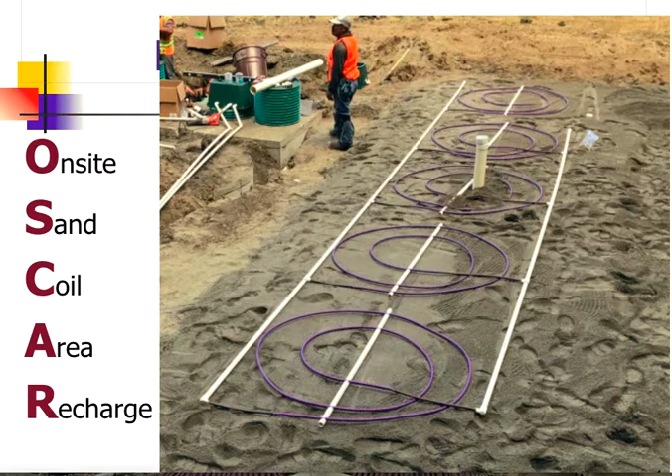The Oscar II is a proprietary technology that meets treatment level C, and it also acts as a final disposal component. We are able to reach a higher treatment level and have the minimum soil depth of 12 inches when we add a different treatment vessel that has a higher treatment level. And we'll get into that in a little more detail toward the end of the presentation.

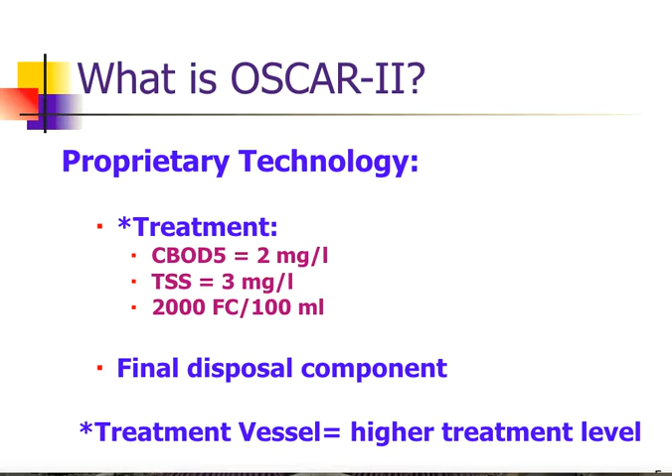The Oscar II is comprised of four main components. There are Oscar coils, which come in two different versions. We have a 50 gallon a day unit as well as a 100 gallon a day unit. The OS 50s are a 5-foot coil. The OS 100s are a 7-foot diameter coil.

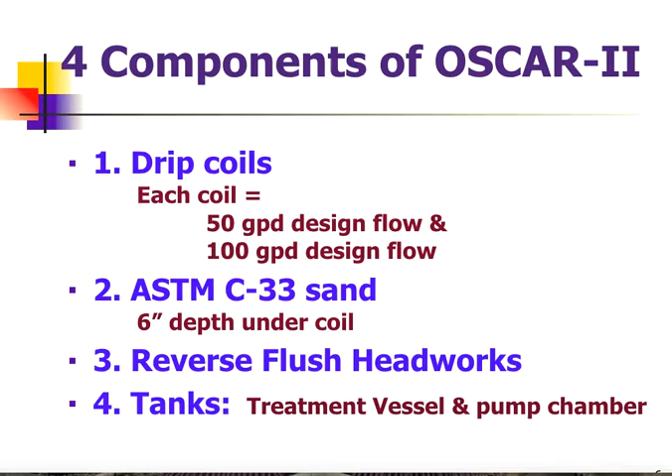We also incorporate C33 as a treatment media, minimum of 6 inches of sand depth under the coil. We incorporate a reverse flush headworks that helps keep the tubing clean and flowing. And then we have two tanks, a treatment vessel and a pump chamber.

When the Oscar is installed, we will prepare the basal area. We'll put a layer of 6 inches of C33 sand down. The coil, which needs to be level, will be placed on top of the sand, and then we'll backfill or cover the coil with another 6-inch layer of C33 sand.

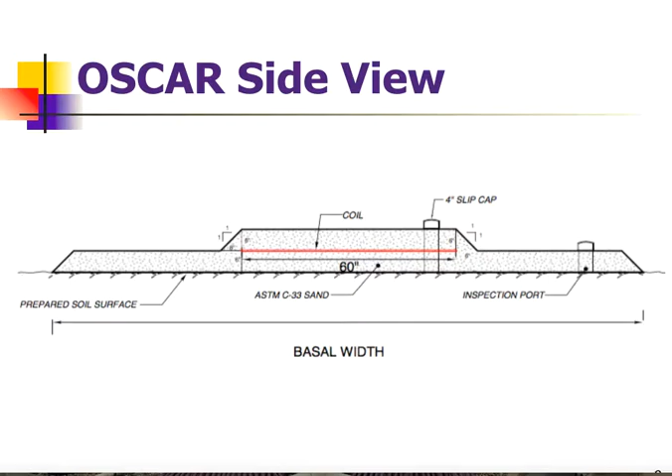After about a year or two, or one or two growing seasons, a grass lawn will grow over the top of the Oscar, forming a nice firm basis. The sand media is firm enough where they can mow this lawn with a riding lawnmower.

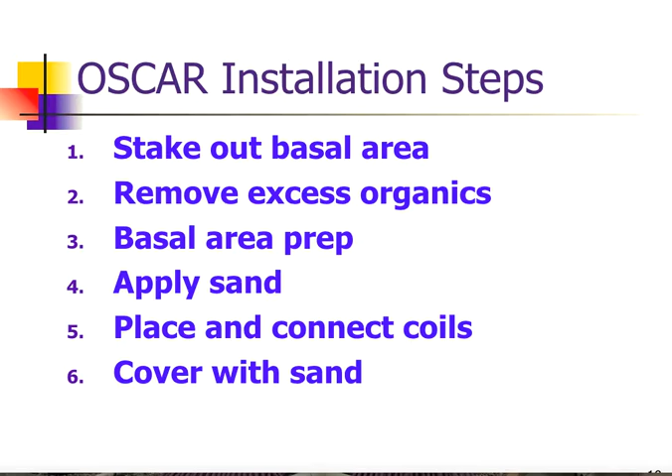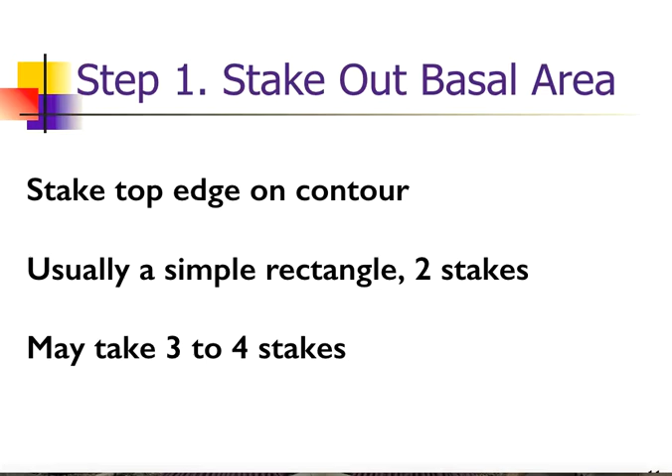To install the Oscar drain field is 6 basic steps. The first step is we want to stake out the basal area. If it's on a contour, we'll want to stake 3 or 4 stakes along the contour on the upper edge to determine that edge. But usually it's as simple as a rectangle with 2 stakes total.

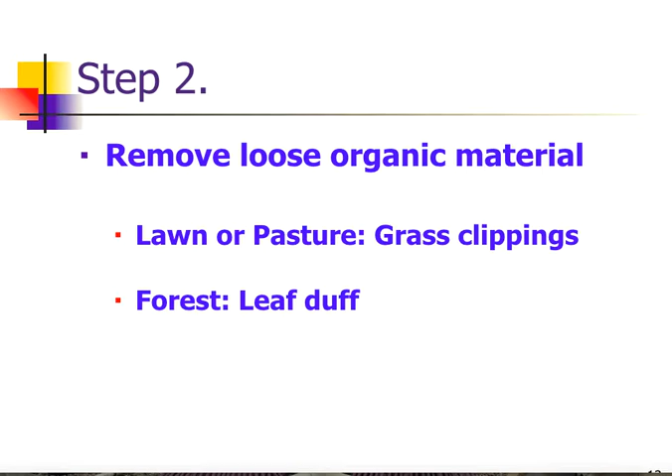Once we've staked it out, we're going to remove excess organic material from the basal area. This does not mean removing the sod. It does mean mowing, whether it's a pasture or a lawn. If we've got very, very tall grass or weeds, we'll need to mow that off down to the sod layer. If we're in a forested area, we do want to take the leaf mat off the ground down to the mineral soil.

At that point, we're going to go and do the basal prep. And that's just as simple as taking the excavator bucket, placing the teeth about 2 inches into the soil, and doing a one-time pass. So we create little furrows within the ground. Whatever sod comes out of the ground comes out. Whatever stays, stays. And so at this point, then we'll go ahead and apply the sand to that surface.

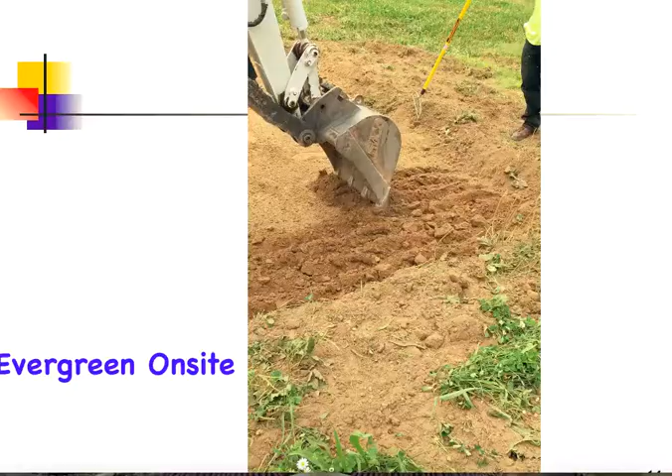Sometimes the ground can be really dry, especially in the summertime, and it appears as if all we're doing is just kind of mixing up or pulverizing the soil. But regardless, even though we've got loose stuff on top, we're always going to be creating a structure within the soil that precludes water from being able to move sideways through the soil or down the slope of the site.

The liquid will percolate down through the sand, hit the soil layer, and if we're on a slope, in order to move down slope, we would have to go over these little furrows or humps, slowing the water flow down and allowing the soil maximum amount of opportunity to absorb the effluent. Once we've created the furrows, we're going to apply the sand.

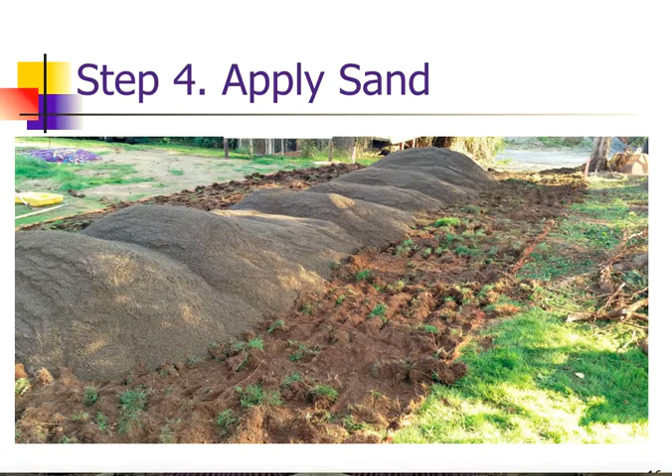We'll spread that sand out to our minimum depth, again of 6 inches. The area that the coils will go in must be level, so if we're on a sloping site, we're just going to have about a 6 foot to maybe 8 foot wide path, depending on whether we're using the 5 foot or the 7 foot coils, where we want to maintain the level pad for the coils.

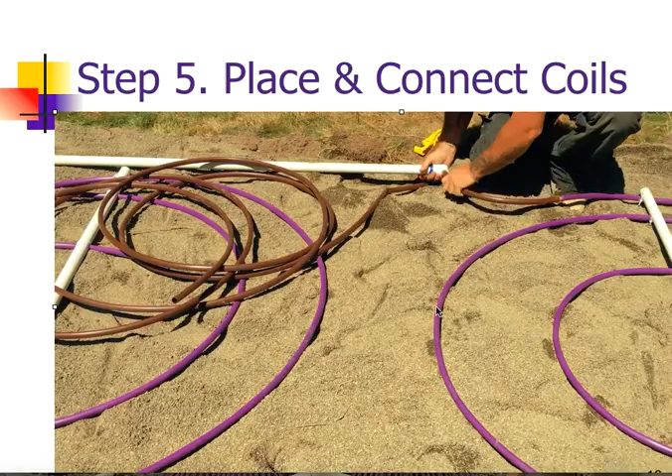Once the coils are placed, we will connect them. The kit that we ship out will include PVC fittings with the adapters, the solid tubing for making the connections between the drip tubing and the manifolds, as well as the couplings to make those transitions. It is important that we have a minimum of 6 inch spacing between the coils. We can be larger if need be.

The simplest way to do the installation, once the coils are laid out and we've got their approximate spacing, we'll just glue a series of 1 inch PVC lengths of pipe together. On one side we'll have the supply manifold, the other side the flush manifold, and then we'll just cut in the connection tees where need be. So there doesn't need to be any measuring, we just cut and glue.

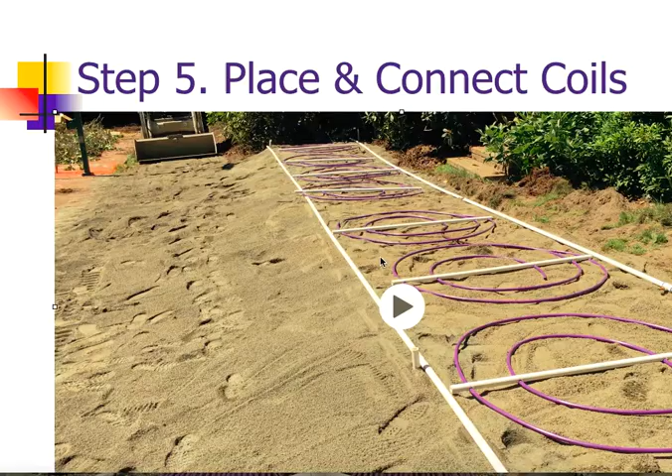Occasionally we'll be on a site where the Oscar will be on a curve. In that case, we may want to put both manifolds on the outer edge, so we have a much larger radius of turn on these pipes. The only concern is that we want to take some care that there will be one length of tubing that will cross one of the manifolds. We just want to bed that so that we don't kink that tubing.

The only material that's required to cover the coils is C33 sand. You may choose to use a little bit of cover soil over the top of the Oscars, which is fine. We want to keep that to a small layer of 2 to 3 inches. Make sure that the soil has very low organics, less than 10% usually.

In cases where it may be a while before the system is going to be used, we'll want to put some straw over the top. But we want to plant grass seed or some kind of ground cover on there as soon as we can. Some people may choose to put some jute mat down to hold the sand in place until vegetation grows.

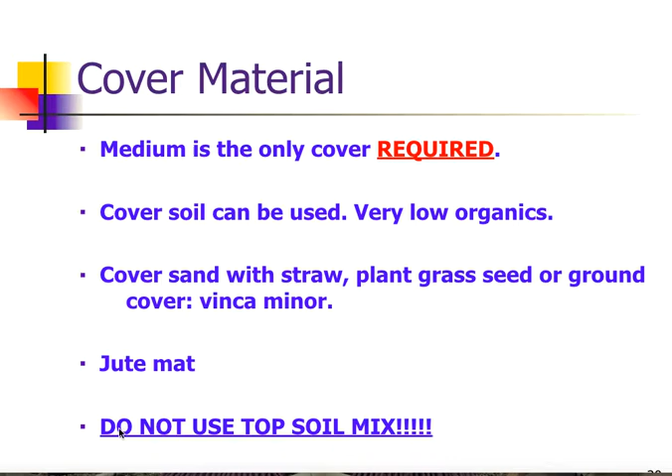Whatever we do, we do not want to put the commercial grade topsoil mixes on there. They have very heavy organic contents, lots of compost. That material tends to hold water, and it makes the system appear to be failing when it's not. Once the Oscar is covered, it has a kind of a stark gray sand cover on top. Again, once we get things planted, it grows quite readily once the system's put into operation.

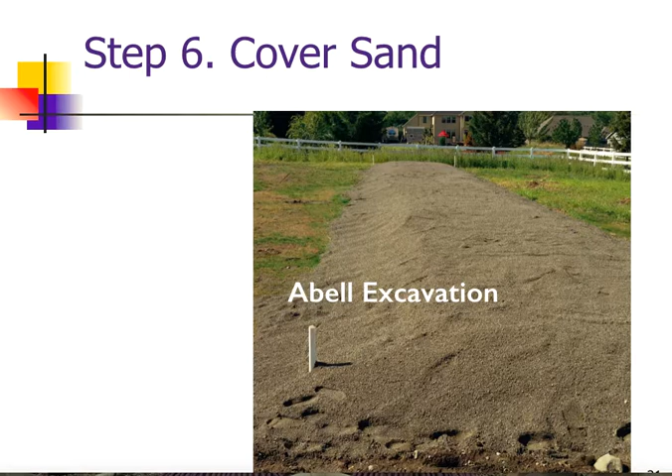It takes about 2 hours, a little less, for two guys to install an Oscar start to finish. That is the drain field portion. So it's a very quick and easy install.

Now, the treatment vessel that we've described really has to meet 3 criteria. One, it must be on the Washington State Department of Health's list of registered wastewater containment vessels. Two, it must be on the Lowridge's list, which we maintain on our website. And the third criteria is these wastewater treatment vessels must have gone through an NSF test and meet at least 100 CBOD and 75 TSS milligrams per liter.

Typically, any system that has done that meets a much higher standard, so we end up really meeting more like a 15-15 standard. One thing though is, if the treatment vessel meets treatment level B, the Oscar 2 can be installed in as little as 12 inches of soil.

An example would be a NuWater BNR-500 tank. It meets the treatment level B standards. When you use that treatment device with the Oscar 2, you'll need to order a NuWater-O. It stands for NuWater Oscar. It is the same package as the BNR 500, just minus the control panel. We'll be using the control panel that's included in the Oscar 2 kit.

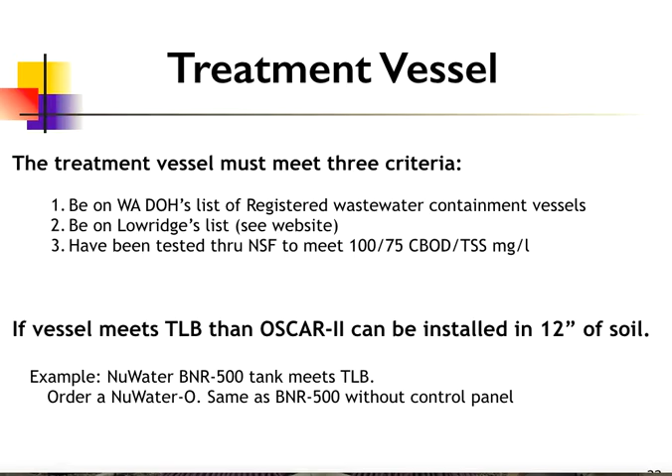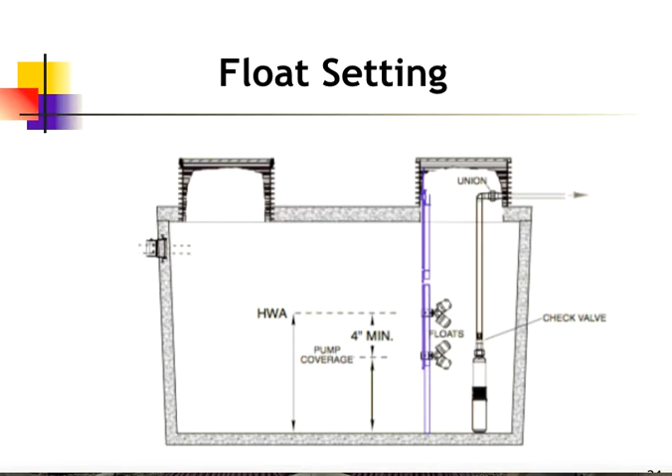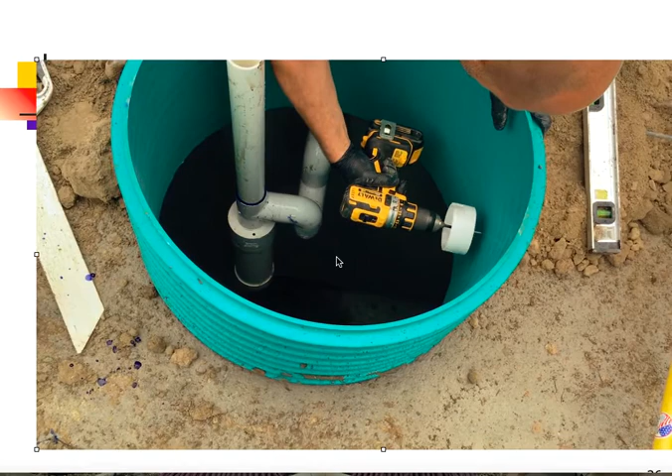Float settings in our pump chamber. There are two floats. We want to have the bottom float at least to the top of the pump, if not higher. The top float is about 4 inches above the bottom float. Very simple settings. The floats in the kit come with float brackets or float collars. It's just a matter of tightening the stainless steel screw at the desired location. We also supply an orifice shield with the stainless screw so that we can use that to hold up our float tree.

So we can just take that float tree, snap it in place. The float tree is the entire length from the bottom of the tank up into the riser. So the orifice shield is just there to hold the pipe in place. The float tree itself holds its own weight by resting on the bottom of the tank.

The placement of the reverse flush headworks will go directly on top of the pump chamber. It will be plumbed in as so. We do want to point the to coil and from coil lines as directly as we can to the Oscars. We'll come out of our pump chamber at 90-degree angles to the headworks, and we will have a flush line, or what we call a vent line, which will go to a 4x1 T supplied within the Oscar kit.

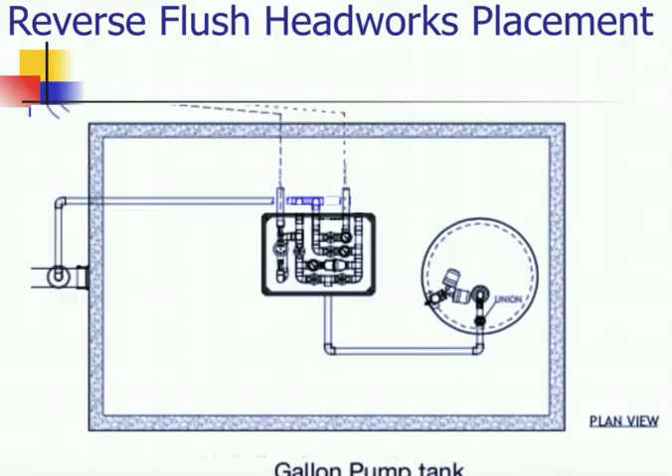Inside the headworks, the internal portion is complete. You will have to glue at four positions: the from coil, to tank, and to coil, and the last one will be from pump. Once those are glued in, the plumbing to the headworks is done. You may want to adjust the box so that the guts of the headworks is centered within the box, so that none of the valves or anything you need to service will be touching the side of the box.

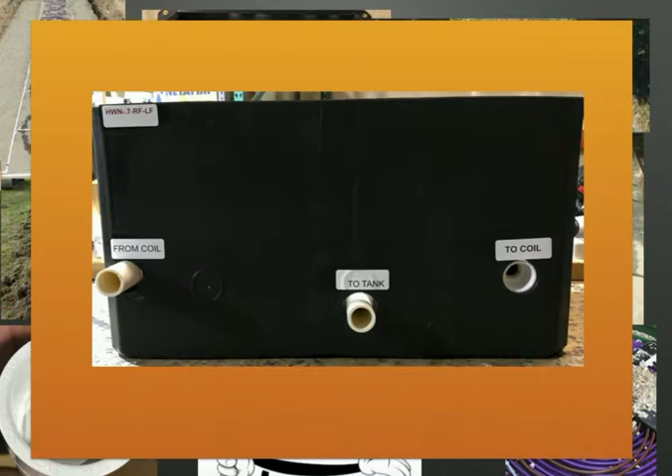The external portion of the unit will just have these labels that will tell you where the plumbing's to go. Again, to and from coil are going to be connected to the manifolds of the Oscar, and to tank will go back to that 4x2 T illustrated earlier. On the flip side of the box, you'll just see a from pump, and that's going to be the pump line coming from the pump chamber.

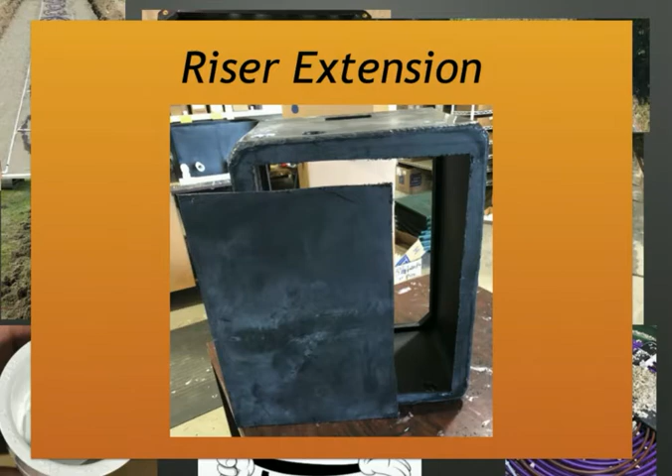Most of your installations are going to require a deeper burial depth than the 1 foot that the riser box will allow. In that case, we always provide a riser extension. The bottom of the box will be removed. The extension will just be placed on top of the headworks box. There'll be about 8 to 10 self-tapping stainless screws. You'll just screw the flange of the extension onto the lip of the headworks box, and that will be firm enough for backfill. Place the lid on and backfill, and you'll be done.

The headworks boxes and the extensions work such that if you have a full 2 foot riser on your tank, by putting the full extension riser on your headworks box and the lid, you'll come out at about a 25.5 to 26-inch tall headworks arrangement. And if you were to compare that with the riser with your lid on there, the lids will be completely even, so it makes it real easy for backfill.

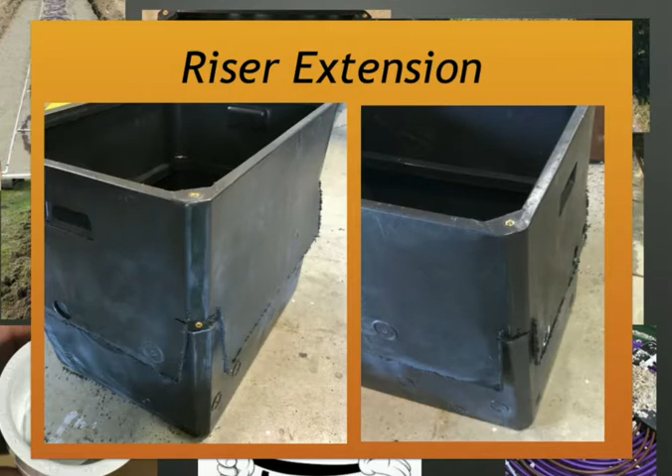Sometimes you'll want to have a riser extension less than a full foot. For instance, if you have an 18-inch tall riser on your tanks, you may want to then measure down from the top of the riser extension your 6 inches, make a horizontal cut, and then remove the corner on all four corners. Also remove the flange on the bottom, and then screw with the screws that are provided, two or three on each side, just to hold it in place.

The extension riser will not settle down with any kind of weight on top. The corners line up so that any of the weight that you may have on top of this extension will be just transferred down through the corner, then down to the bottom of the tank or bottom of the box. And when you're through, it's a nice clean installation. And at the end, just put your original lid on the riser extension and backfill.

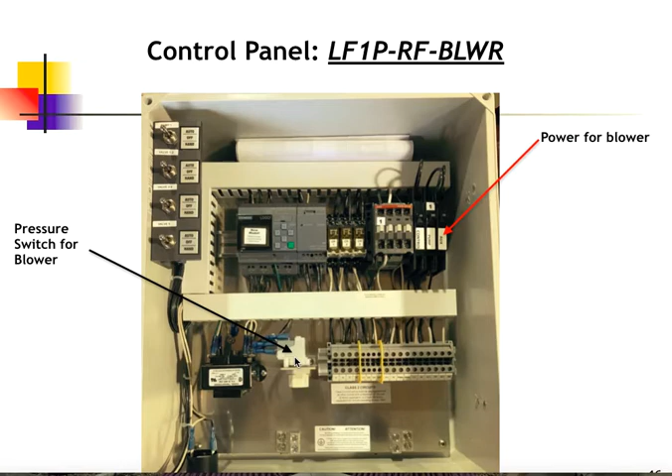Now, once the system is installed and wired, we want to conduct a quality control check called the startup procedures. In this process, we are going to verify that the floats, pumps, and valves are all wired correctly, and we'll also record the flows and pressures to be able to validate that the system actually was installed as intended.

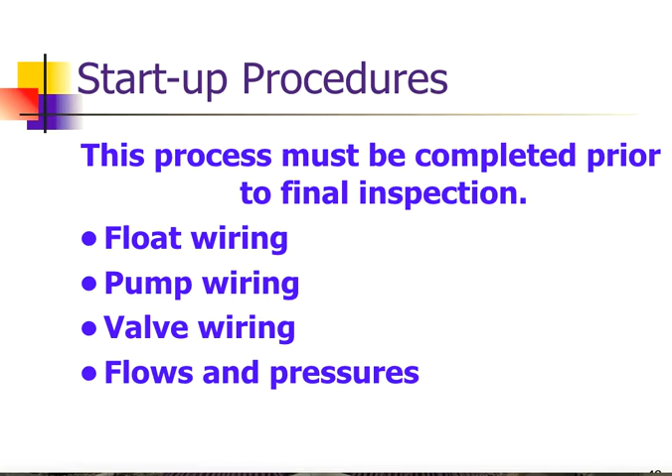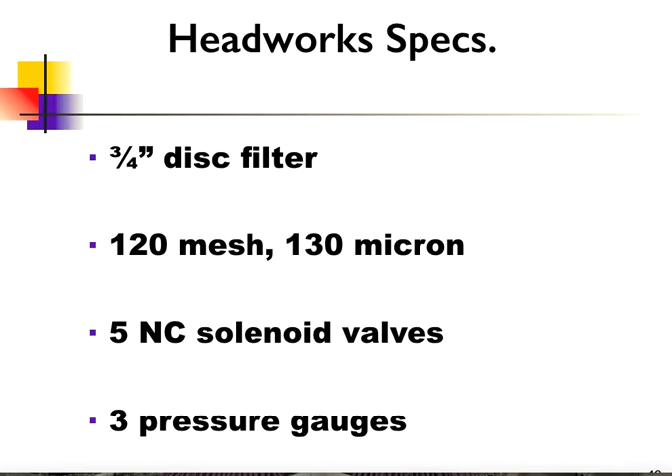Our Headworks has a 3/4 inch, 120 mesh disc filter. It has 5 normally closed solenoid valves and 3 pressure gauges. The solenoid valves are made for a sewage type application. They are not irrigation valves put in the wrong application. All the valves are normally closed, which means in order for anything to flow through the valves, we need to have at least 24 volts to energize the solenoids, as well as 15 psi to open the valves. So we need electrical current and hydraulic pressure.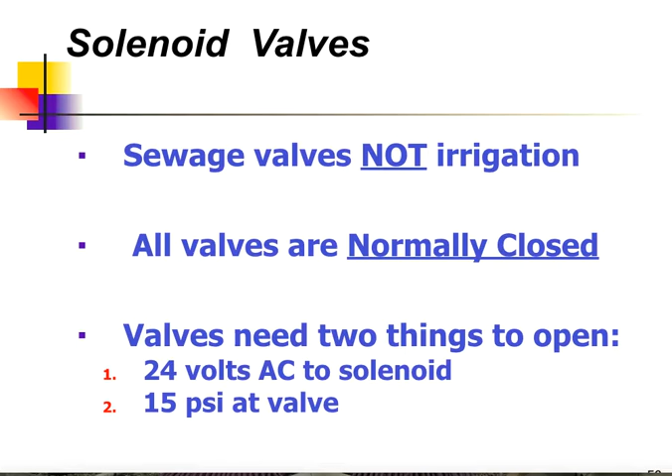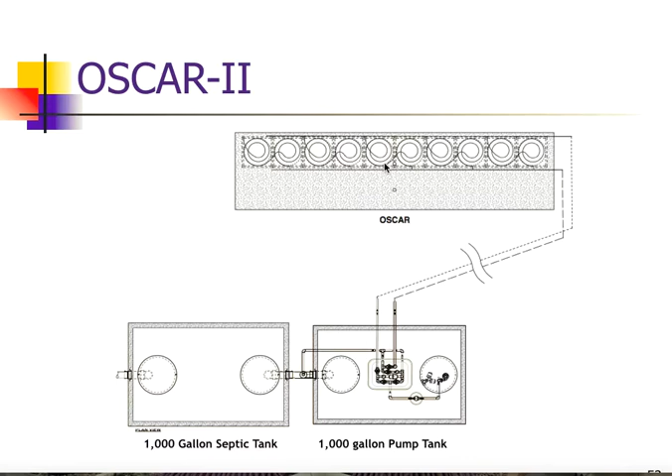When the control panel is actually set up to give us 90 doses, at the 91st dose, it's going to back flush the disc filter. After that, we are going to forward flush the coils, and then we'll start another 90 doses, and it just keeps repeating these same processes. So we want to be able to validate or check that the wiring was put together so that these functions will take place.

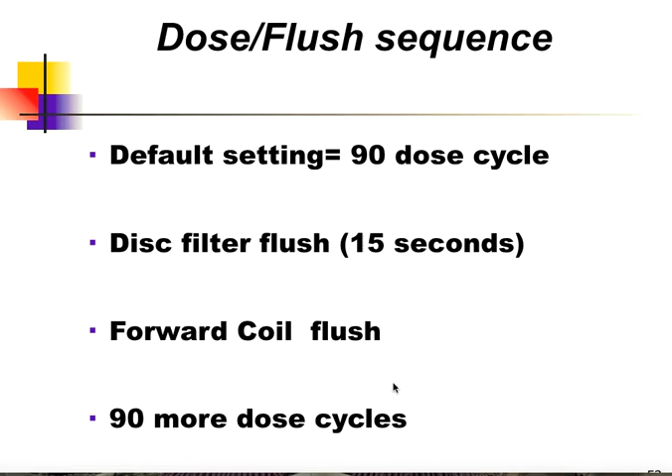In our control panel, you'll notice there are 4 toggle switches. One toggle switch will operate our pump. It can either be auto, off, or manual, or hand. We have 5 solenoids, but 2 of the solenoids, 1 and 2, always operate together. Another 2 solenoids, 3 and 4, operate together, so there's one toggle switch for it. And then we've got a 5th valve, so we have a separate toggle switch for it.

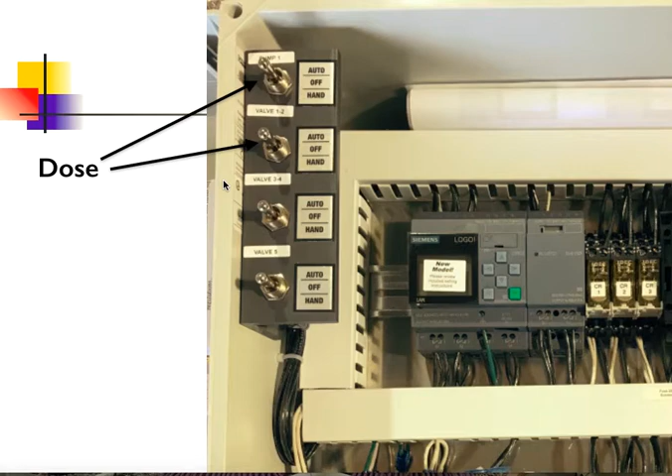So if we want to test the headworks and make sure the pump is wired correctly, we will turn pump number 1 to hand, and then we also want to get power to valves 1 and 2, so we'll put the second toggle switch into the hand position. And what will happen is as the pump comes on, this green line demonstrates the flow path. Because only solenoids 1 and 2 are open and 3, 4, and 5 are closed, our flow path will follow this route, go through the disc filter in the forward motion, and go out to the coils in the Oscar, and then we'll deadhead against valve 5.

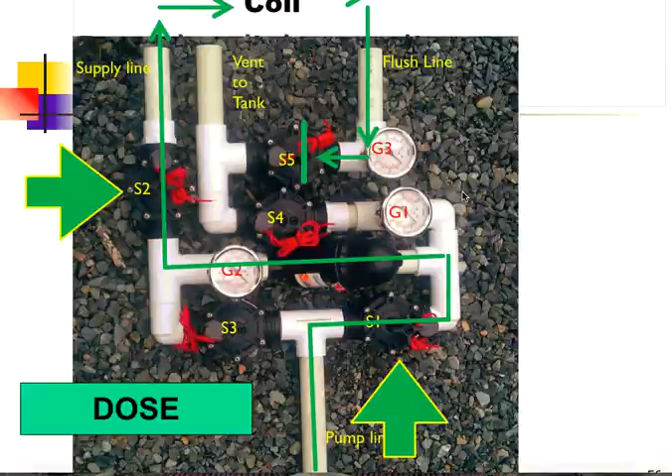When we do that, our pressures on all three gauges will be about 50 psi, somewhere between about 48 and 52. And that'll indicate that at least these two valves and the pump have been wired correctly. And this is what the flow path would look like if you could see how it was going in the piping itself.

Once we've verified that we've got the dose works with valves 1 and 2, we want to test the reverse flush sequence. The normal flow through the filter is water will come in the filter housing and then move from the outside of the discs to the inside center and then out to the coils. What we'll do on this filter flush is we're going to reverse the flush, make it go backwards so that it pressurizes the inside of these discs and then forces water at high pressure and flow out to remove any debris that's trapped inside the discs.

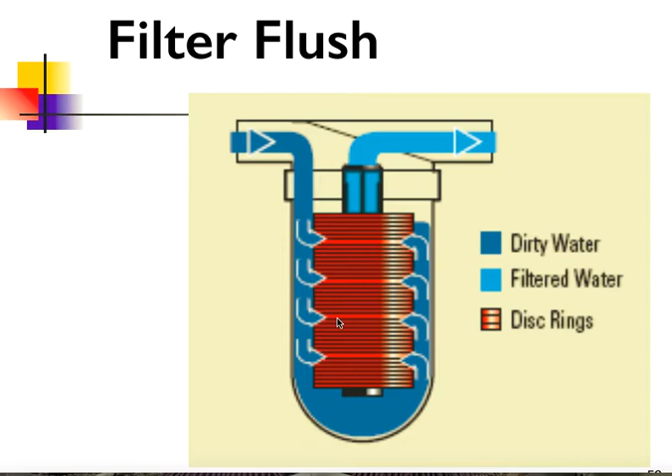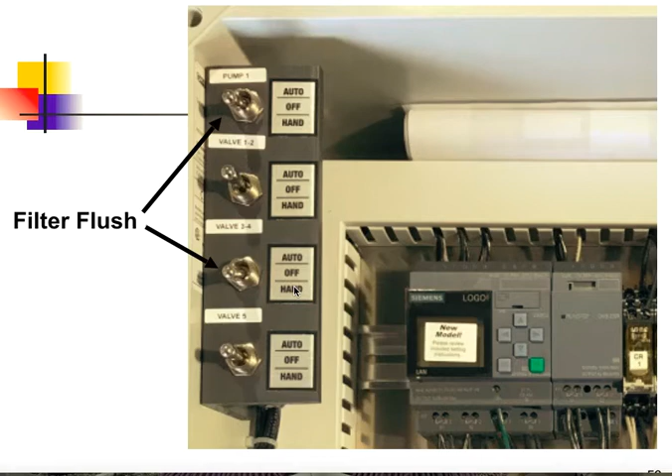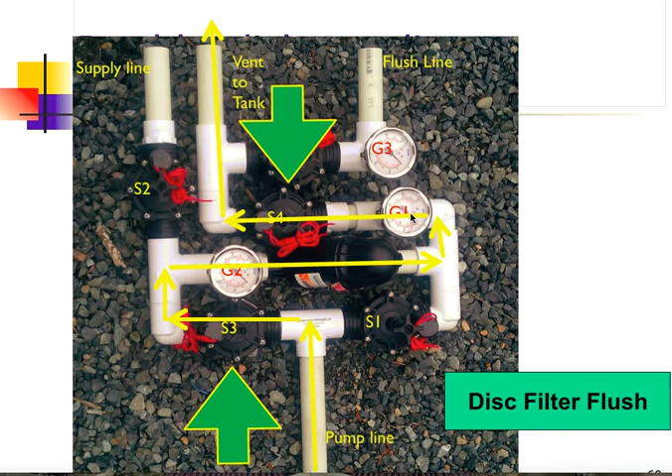What's not shown here is a spring that when the pump comes on will actually compress and relax the tension on these discs, which will allow more material to be dislodged during the back flush sequence. So in our control panel, we'll turn pump 1 on. We'll turn valves 3 and 4 to hand. And now the flow path follows the yellow line. And the way we'll be able to identify correct wiring or operation is that gauge 2 will be at about 20 psi. Gauge 1 will be at about 10. And we will have a significant flow going back into the inlet of our pump chamber.

And this is what the flow path would look like. Because we have no flow and pressure going to gauge 3, it'll read 0. And if we were to measure the flow in our flow meter, we would see about 28 gallons a minute in this short circuit between the pump and back into the tank.

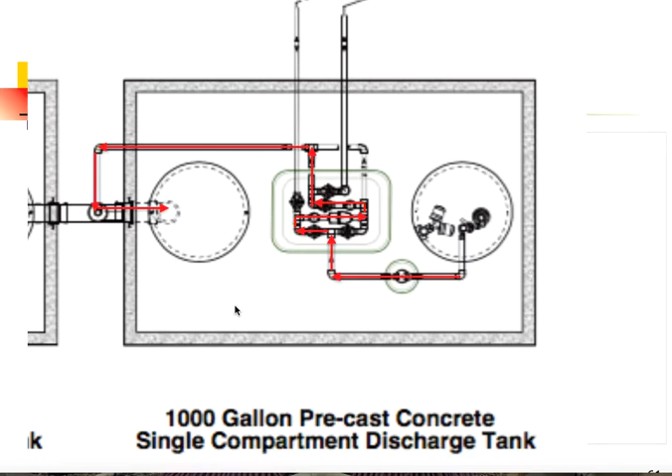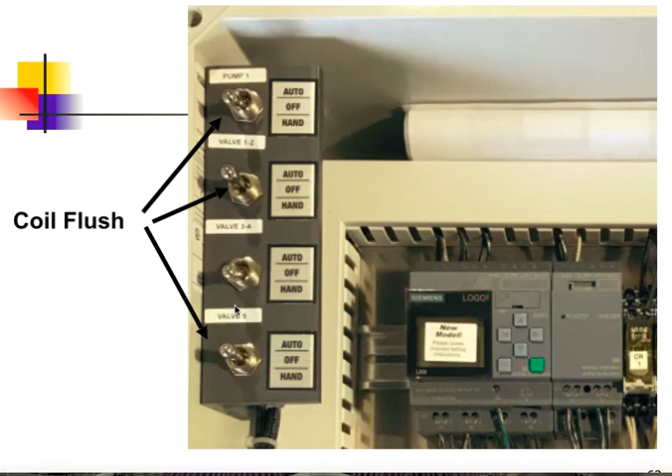The last thing we want to check electrically will be the flush cycle. Here we want to turn pump 1 on. We're going to have valves 1, 2, and 5 energized. And it'll be very similar to our dose sequence, except that with valve 5 being open, we're going to relieve all this excess pressure and allow the excess flow to go back in the tank. And in this case, we're going to have pressures on gauges 1 and 2 of about 40 psi. Gauge 3 will have 0, maybe 1 or 2 psi at the most.

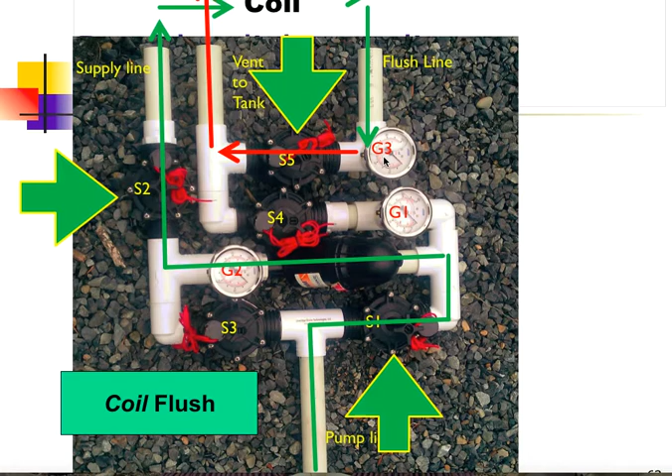And this is what the flow path would look like in that case. Now the flow coming into the tank will be about half of the flow as when we back flush the disc filter. We've got quite a bit of friction loss, and we do have some pressure and flow loss within the coils themselves.

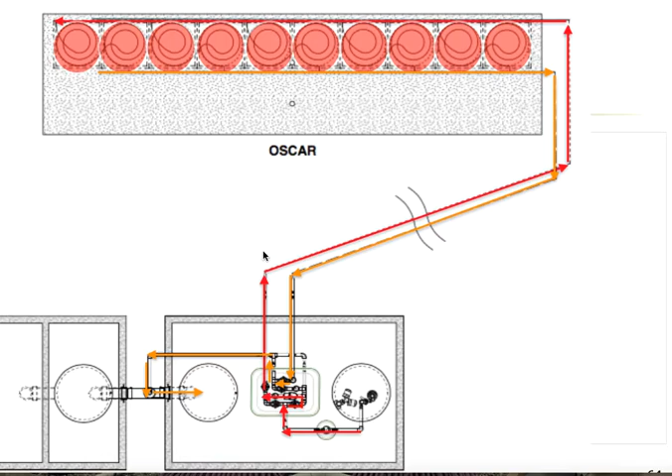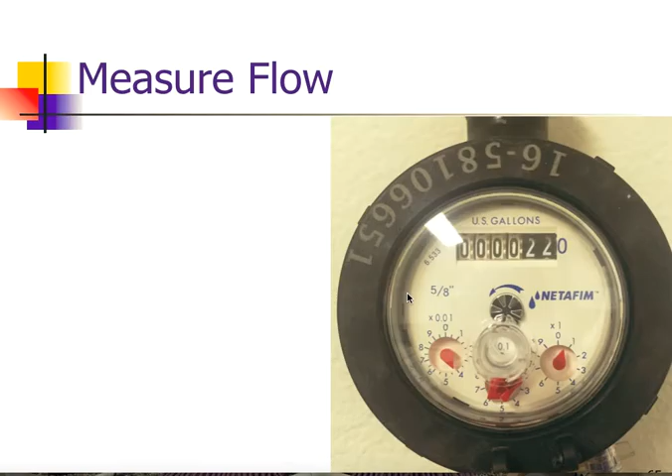Now, when we're doing the dose, where we just have valves 1 and 2 open and with the pump running, we're going to want to be able to measure what the emitter discharge rate is. On these disc filters, on these flow meters, you'll notice that we've got 3 dials and kind of an odometer here.

The first dial on the right here, each digit here will represent 1 gallon of flow. On this middle dial, it's 0.1, so each digit is 1/10 of a gallon of flow. And this is 0.01, so this dial will be 1/100ths of a gallon of flow per digit.

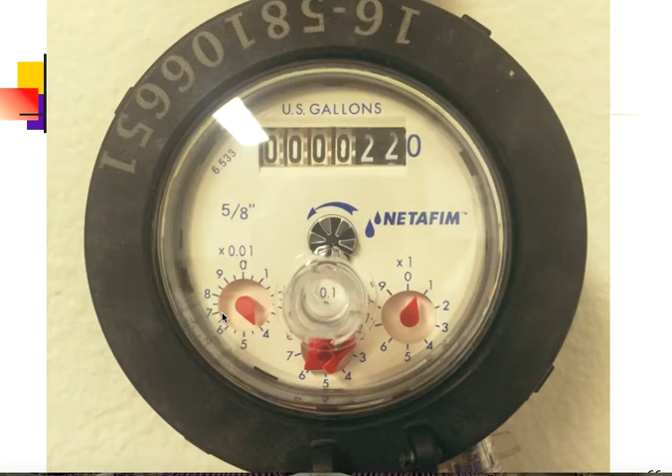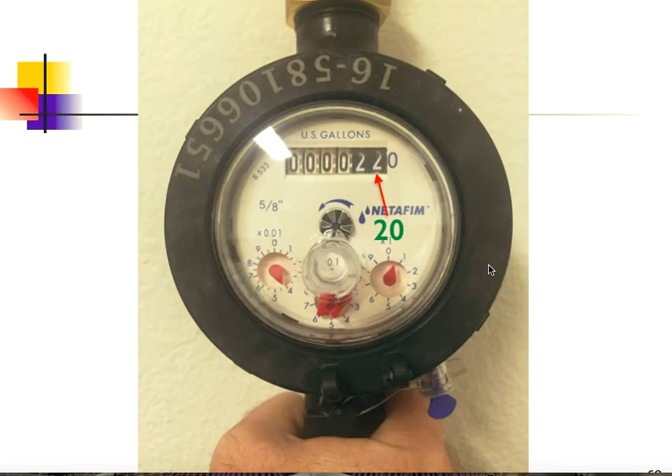So if we were to read this dial, or this pressure flow meter, this first backlit or dark background number is actually the 100s, and this is for the 5/8 inch filter. So this first number would be 200. The second number is 20. And we paint the single digit as a representation of just 0 here on the face.

So we'd have to read the single digit dial, and it's less than 1. So we'd have to continue on and look at what the tenths and 100ths dial say. So if we were to record what this meter's told what their total flow has been so far, we would write 220.64 gallons.

Now, the advantage of using this particular meter for just measuring the flow is we don't have to use any math. All we'll need is a stopwatch on our smartphone, and we'll time 1 minute, and in that minute we'll just count the rotations of this middle dial, and that number of rotations in a minute tells us what our gallons per minute flow is.

Again, no math. You don't have to worry about rounding numbers, getting the right start and stop readings, and doing the subtraction correct. Just run the stopwatch for a minute and count those rotations on that middle dial.

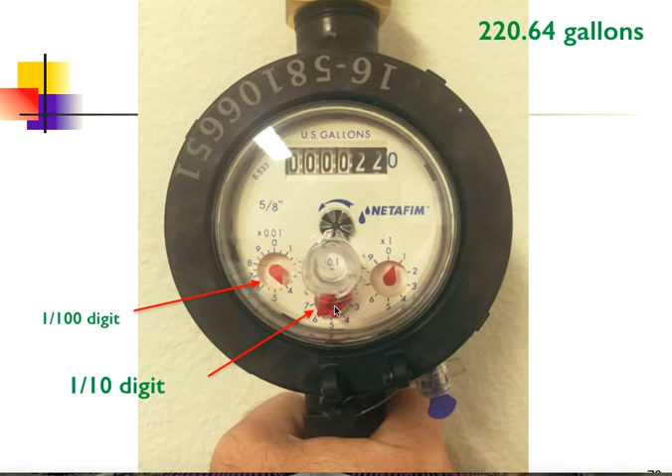Now, the math you will need to do is you will need to have an idea of what the flow per coil is. On the 5-foot coils or the OS50s, it's 0.35 gallons a minute per coil. So an example would be having 10 coils for a 500 gallon a day system. We would have a flow emitter discharge rate of about 3.5 gallons a minute. The OS100s are twice as large or have twice as many emitters, so they'll flow at twice the rate at 0.7 gallons per minute.

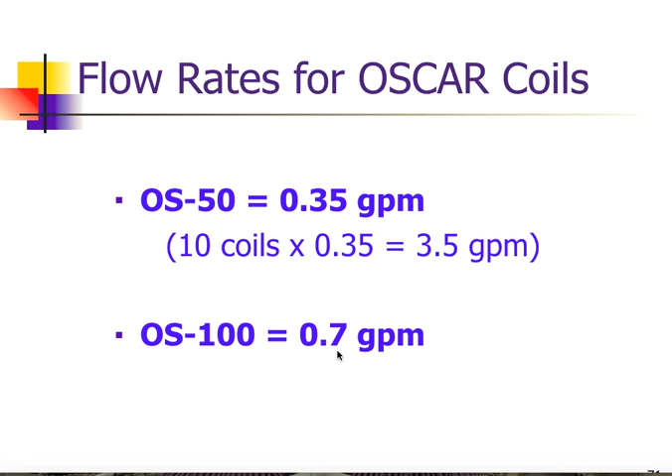And of course, we need to know what to record. Really, it's only two criteria. We want the pressures during the dose on gauges 1, 2, and 3. And then we're going to know what the emitter discharge rate is during the dose.

Now, the control panel is set up with a factory default setting of 3 minutes 38 seconds off and 22 seconds on. That does not need to be changed. The number of coils will increase the flow, but the time sequences will stay the same. These are pressure compensating emitters, so it makes it very easy to do the setup on the system, very easy to do the design as well as the installation.

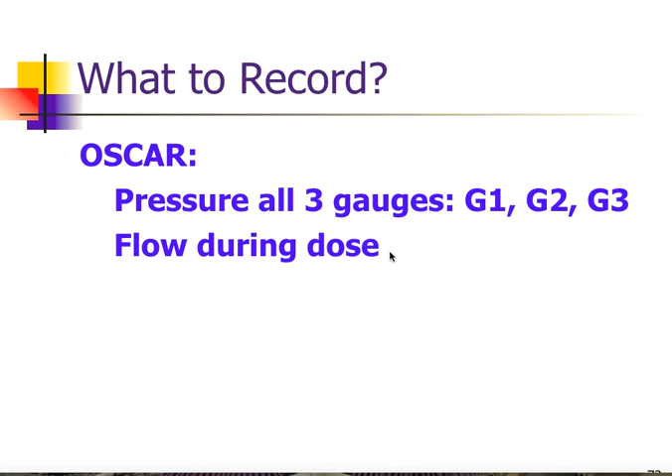Now, our certification process starts with a classroom training or this online video training. Once you've completed this, I would suggest that you give us a call. We will then answer any questions you have, talk about a couple of details that we may need to go over. But from here, we'll put your name on our certified list of professionals as an installer. Then either one of our distributors or someone from Lowridge will come out and do the first install with you on site.

What we would ask is that the tanks be in the ground and that you do the basal prep and place the sand on the prepared area. And then we'll show you how to do the coils, the reverse flush head works, and so forth. Takes really a very short period of time. Once the system has been electrically completed, we'll come out and do the startup procedures, again, to make sure that everything's working the way it's supposed to.

And then if there's anything else that's needed, whether that day or in the future, whether it's a phone call, another site visit, we could even do things through FaceTime on smartphones, or pictures and text videos will work as well. So we're here to back you up, make sure you have all the information that you need.